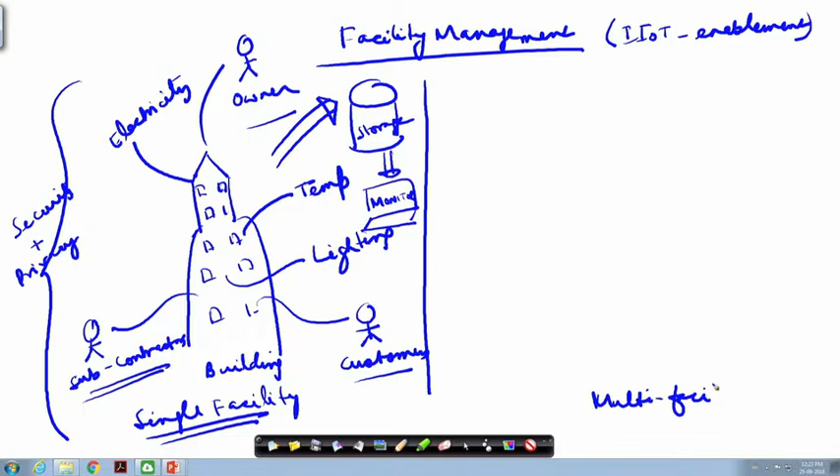So this was the single facility example. Let me now give you another example: the multi facility, where you have multiple facilities being monitored. So here we are not just talking about a single building, but we are going to have maybe a cluster of buildings and so on, which all will have to be monitored. These will have different antennas fitted with them to send the data out of these buildings and so on.

So we have these multiple collection units, and each of these buildings have their own subcontractors, and finally this data will have to be sent to the manager or the control station. There could be a manager sitting in the control station who is the facility manager, keeping an eye on the entire facility. In between, because we are talking about multiple subcontractors and so on, you could have an intermediate subcontractor who could be sitting in between and could help this controller or manager to monitor the facilities appropriately. So this will be for multi facilities, the multiple facility scenario and the single facility scenario, and IIoT enabled facility management in both of these scenarios is what I just showcased you.

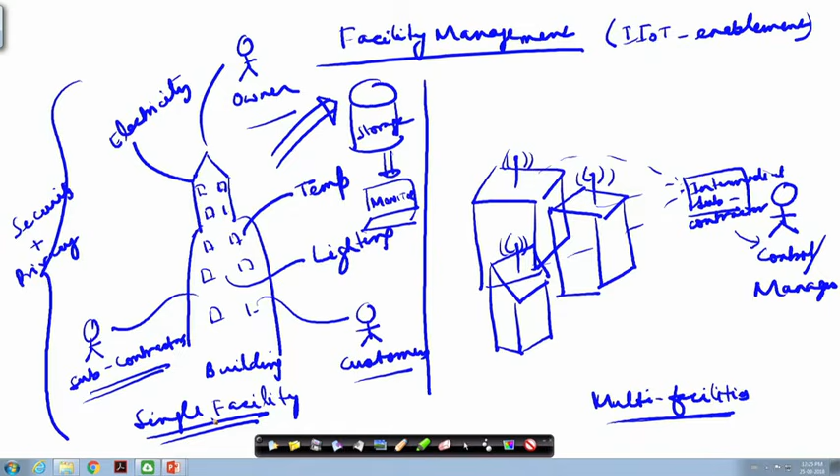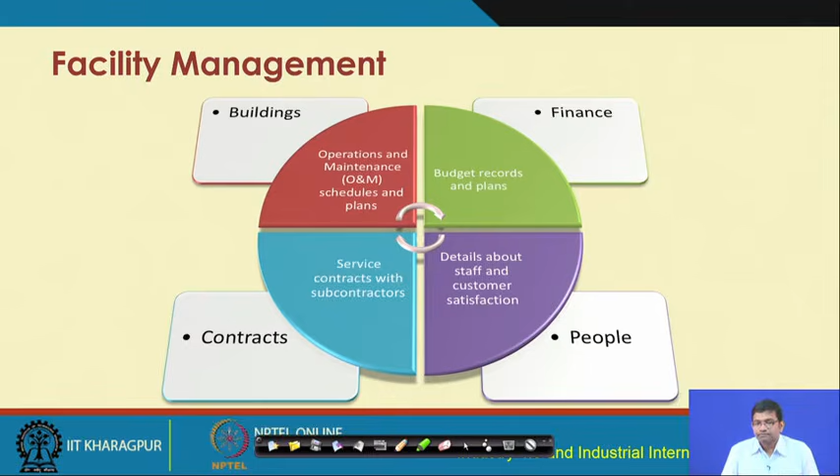So let us now go forward and try to understand the different concepts in facility management. Whenever we are talking about facility management, we are talking about buildings, finance, people, contracts and so on. So all of these will have to be managed. It is not merely buildings, it is not merely people. Facility includes all of these different dimensions, and their management is what facility management talks about.

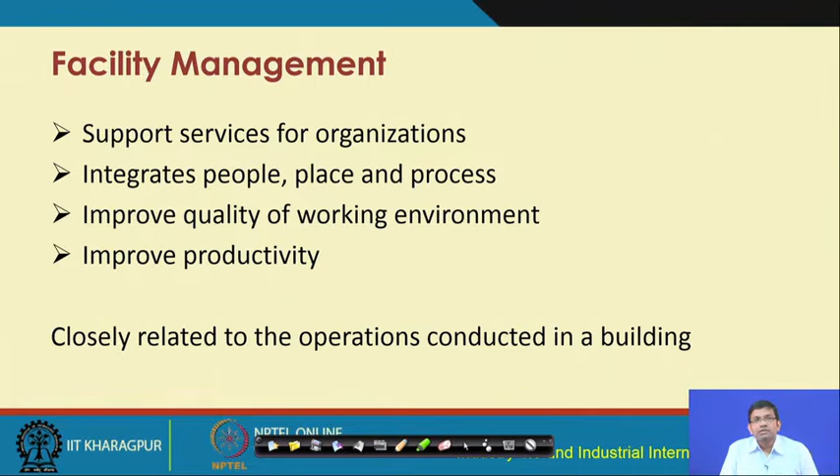So facility management would offer support services for organizations, would integrate people, place, process, would improve the quality of the working environment, would improve productivity, and these are closely related to the operations that are conducted in a building and monitoring, managing those different operations. So facilities manager is going to do all of these different things.

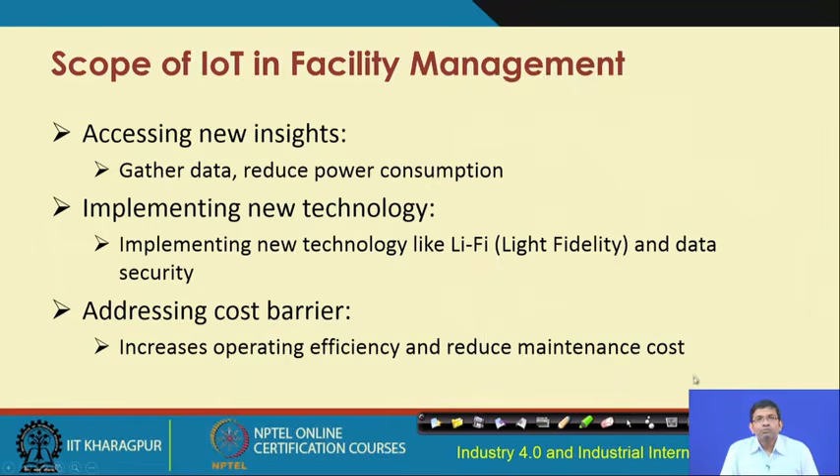So scope of IoT in facility management basically concerns the deployment of these different IoT devices to get new insights through the access or gathering of the data, reducing power consumption in these facilities, implementing different newer technologies such as Li-Fi, advanced security mechanisms and many different other technologies, addressing the cost barrier, increasing the operating efficiency, reducing maintenance cost. These are the scopes of IoT implementation in facility management.

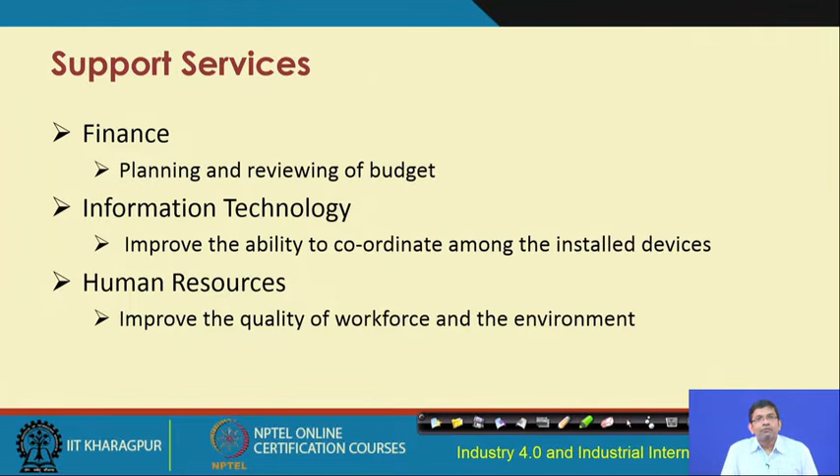Support services will have to be offered in terms of finance, IT, human resources. Management of all of these different support services is also of concern of facility management. Facility management also talks about administrative support, offering administrative support, marketing, knowledge management, business development and so on. So these are the broader services offered as part of facility management, but these are also inclusive in facility management.

So basically the key idea of facility management is to get a comprehensive detail of each and every infrastructure, every facility, every machine, the faults, the history, usage, modification. So obviously without this IoT implementation, efficiently and effectively getting all of these types of information, managing these information over a connected system would not be possible. So IoT implementation is paramount for improved, efficient facility management.

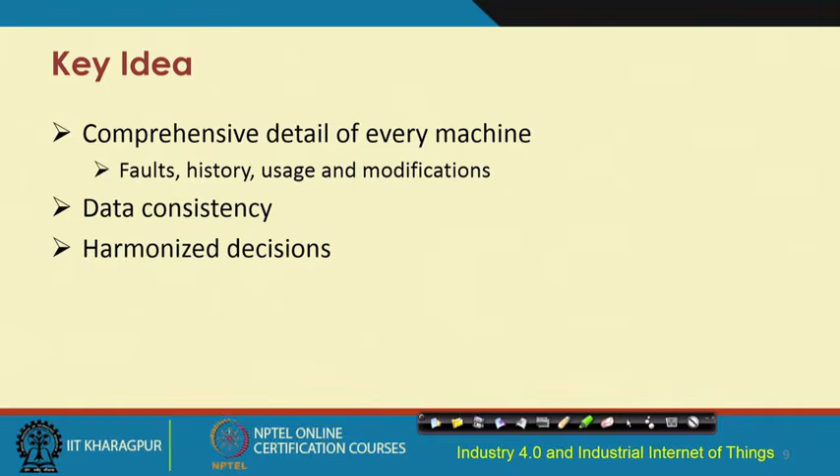Ensuring data consistency and making harmonized decisions is what a facility manager should also deal with. The real power of facility management is to predict events before they occur and to measure and prevent predicted hazards. Advanced analytics and big data management need to be implemented because the nature of data in facility management through IIoT implementations is basically big data.

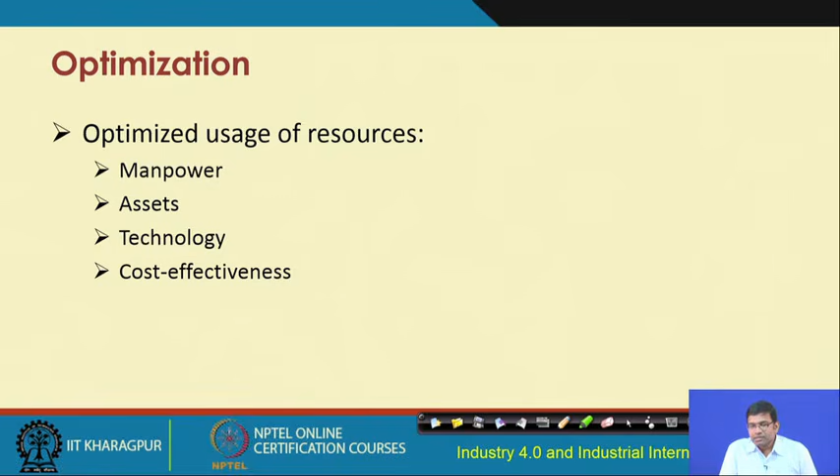Optimization of different resources, manpower resources, assets, technology, and cost effectiveness are also optimization issues a facility manager deals with. Different challenges with facility management include cost management, that means balancing the quality of the facility with respect to the budget, aging of the inventory, taking proactive and preventive maintenance. Changing regulatory and compliance standards, and enforcing those within the facility, are also part of facility management. Security management to protect infrastructure, facilities, and machinery against security breaches and threats is also part of it, but remains a challenge.

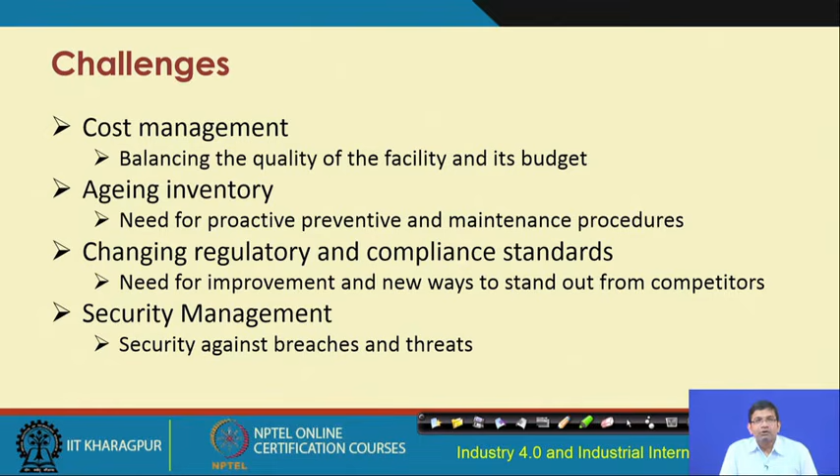IoT application in facility management would include using these IoT devices for smart lighting, smart refrigeration, use of smart meters, and smart fire suppression systems. If a fire occurs, detecting it in a smart way, controlling it, and suppressing it in a smart way are also part of improved IoT application in facility management.

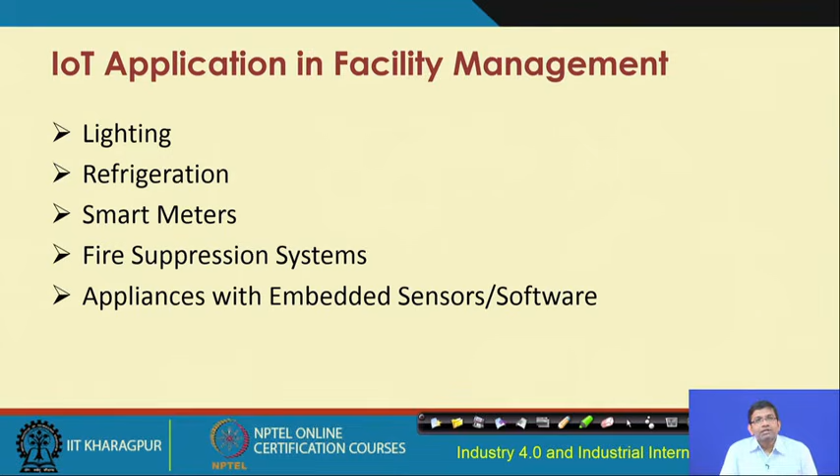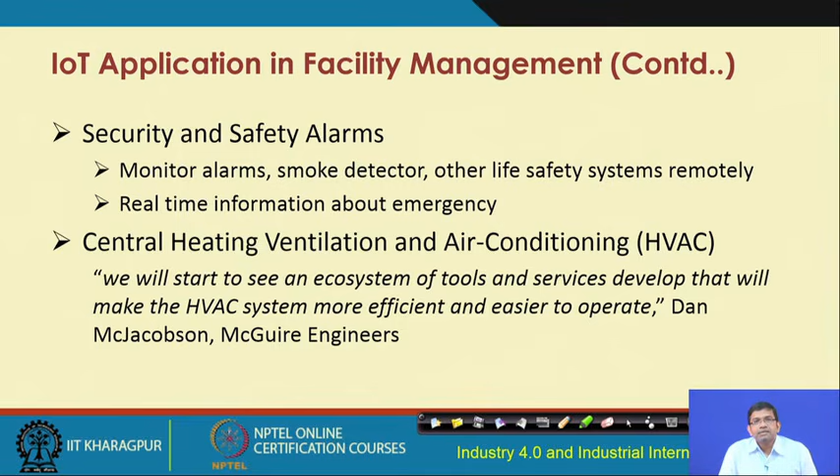IoT application in facility management also includes installation of security systems, safety alarm systems, and dealing with HVACs, which are the central heating, ventilation, and air conditioning systems, serving as central systems for air conditioning and ventilation. Room reservation scheduling is also part of facility management, using IoT for real time status updates of meeting rooms to ensure there is no double booking.

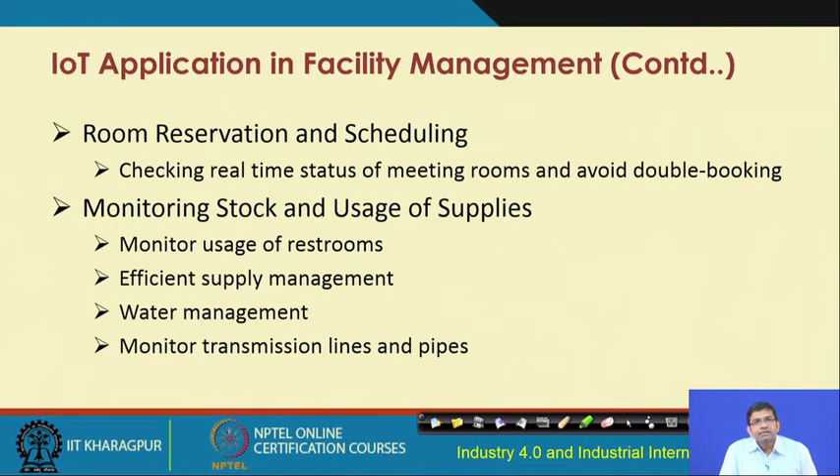This is just an example of IoT enabled facility management that can be achieved. Monitoring of stocks and usage of supplies are also possible, and these could be done efficiently with IoT application.

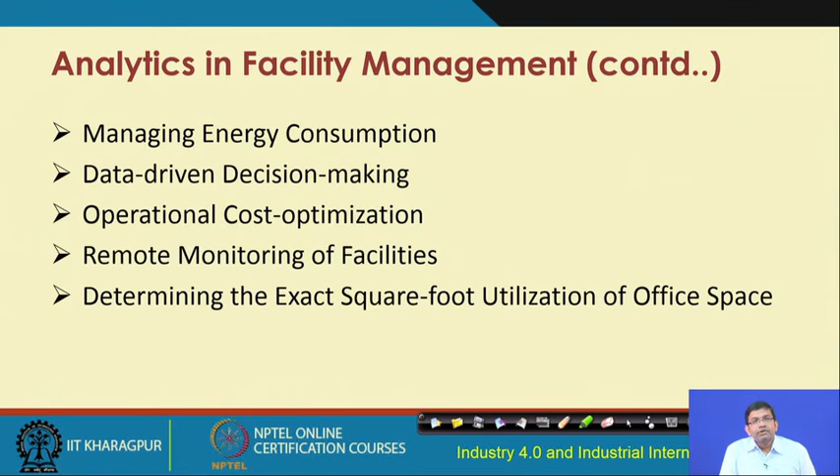Analytics is very important because there is no use of the data collected through deployment of IoT devices if you cannot deal with this data and get insight out of it, otherwise the data is useless. Managing energy consumption, making data driven decisions, operational cost optimization, and remote monitoring of facilities are all concerns with respect to analytics in facility management.

The benefits of facility management include improved customer experience, preventing unauthorized access, real time tracking of different activities within the facilities, real time tracking of intruders, and surveillance using different cameras, CCTV cameras, and so on. Most importantly, optimization means the ability to do more with less resources, optimizing resources and improving productivity. This is an important benefit of facility management.